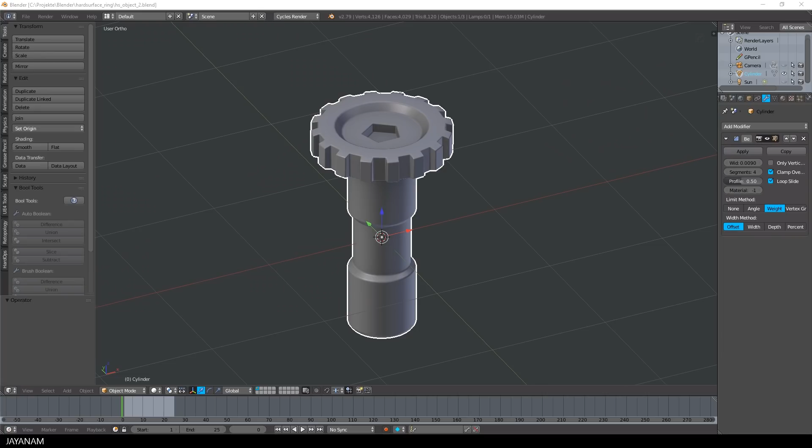Hi guys, this is Jayanam and today I'm going to UV unwrap the Blender hard surface model we created in the last tutorial, and I will texture it using Substance Painter.

So here is the model and I switch to edit mode. Now you can see the sharp and weighted edges in blue color, and I have to select now all the edges that I want to mark as seams. The first edge loops that I want to select, and this is a bit tricky, are the horizontal edges of the gear.

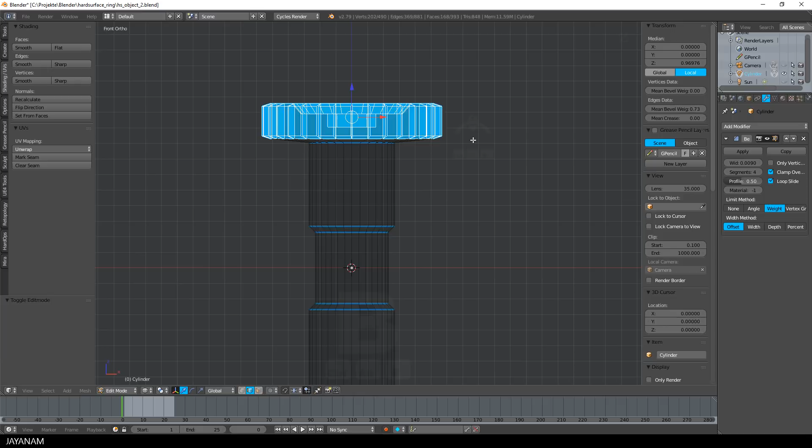So I snap the view and turn to wireframe mode, then I press B for box select and select these edges here at the top. Then I press C for circle select and hold the shift key down to deselect all the edges that lie in between these two horizontal edge loops.

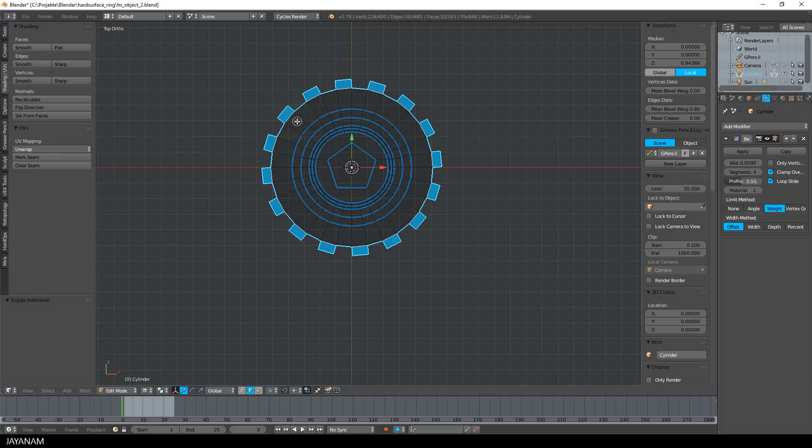Okay, now I snap the top view, then again press C and scroll the mouse wheel to have a bigger circle selection. And then again with the shift key pressed I deselect all the edges that are covered by my selection circle. And the last thing that I have to do is to deselect all these parts here. And I end up with these two edge loops selected.

Perhaps you have a faster way to do this, I don't know. There's always a better way. And now I mark them as seams. And now I'm going to select the next edge. I will add 3 seams of the vertical edges of the gear, and I'll try to divide it into 3 parts.

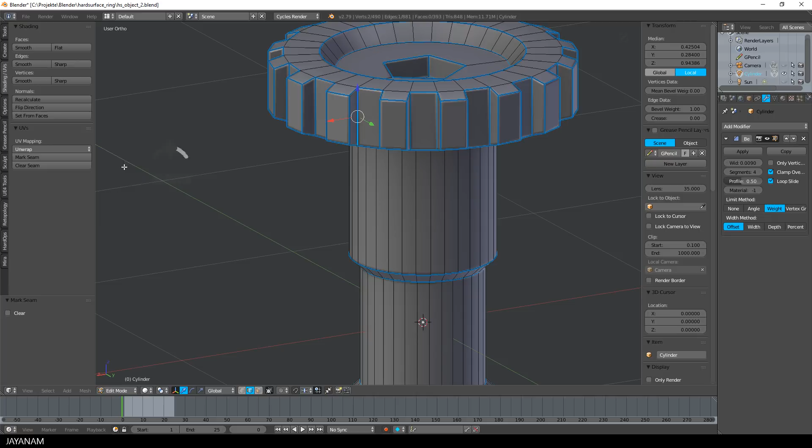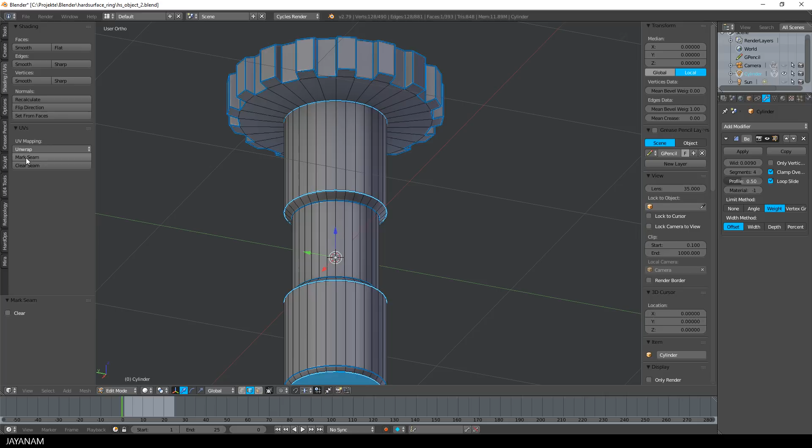Okay, then I will again select these horizontal edge loops by pressing Shift and Alt and right click, mark them as seams. And then 1 seam along the cylinder. Okay, I think we can go with that.

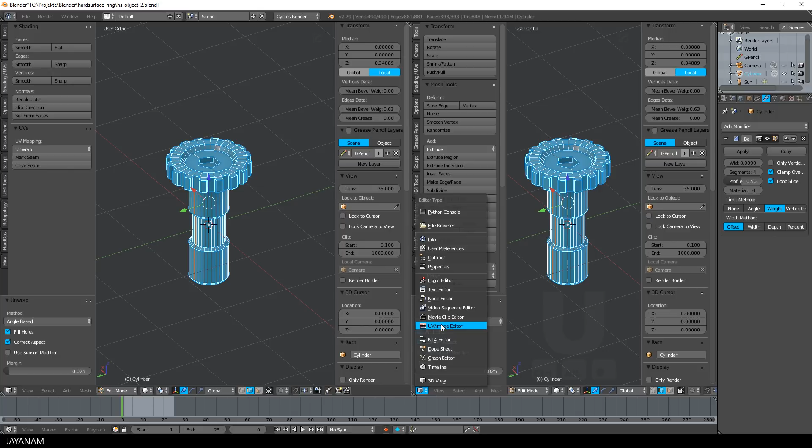I select all, press U and unwrap, then open up the UV image editor. And this looks pretty good, but I will rearrange them a bit. Just select them, press G to move them around. These ones I will rotate 90 degrees. Also this one.

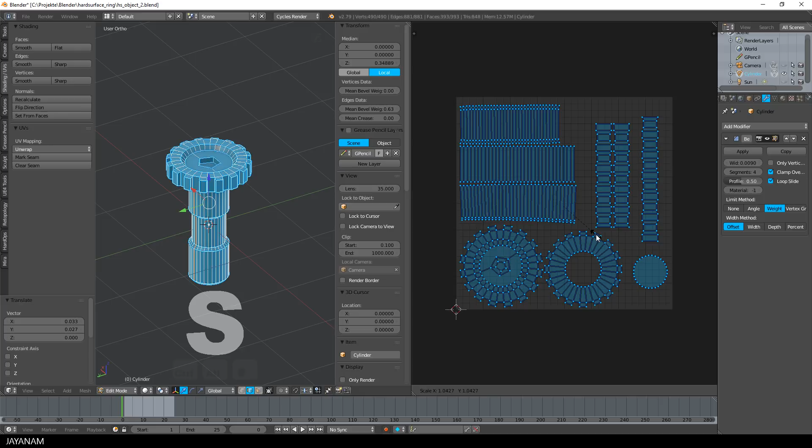Then I select all, move them to the center and scale them a bit up. Just like that. Okay. For these parts here I can press Alt and E to get nice rectangles. This functionality comes from the add-on UV Squares. It's free and I added the link to the description of the video.

Now let's export this as FBX. Choose File, Export, FBX. Then choose Mesh and Selected Objects Only and press Export FBX.

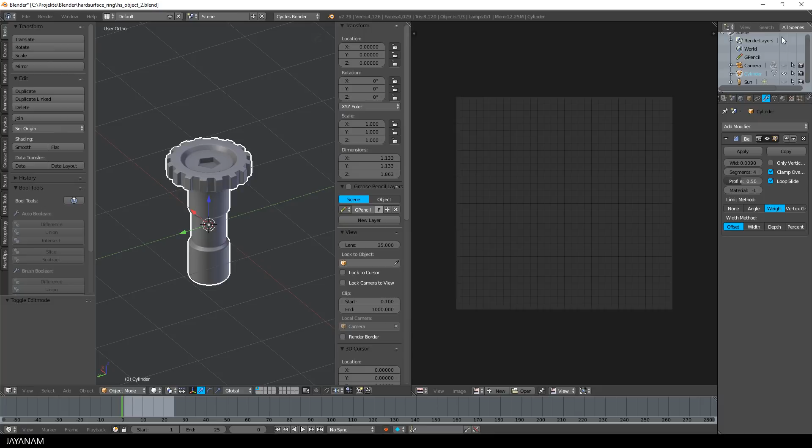Okay, and now we'll kind of test this by adding a simple texture using Substance Painter. So open Substance Painter and create a new project. Select the FBX that we just exported. Then press OK. And here's our model. Looks great, but now I have to bake the textures.

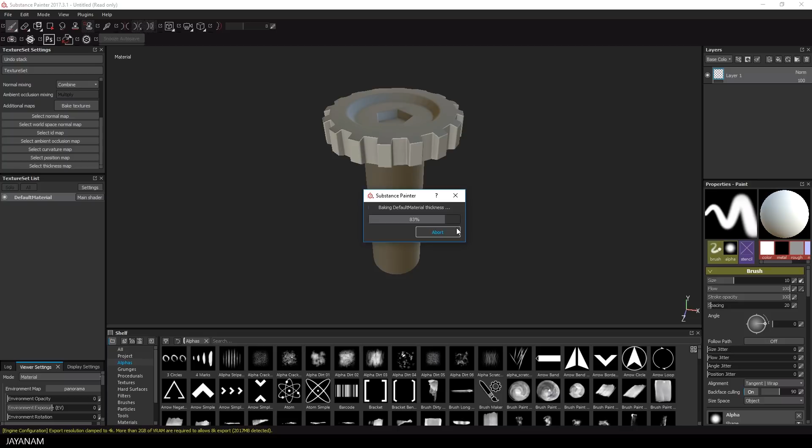And I bake them as 2K. We don't need the ID map. And then I press Bake. Okay, looks good. Now we'll adjust some settings here of the viewer to have shadows and some post-processing effects.

And then I drag a smart material, for example this one here, to my layer stack. Okay, that looks nice. I don't see any artifacts or strange shading behavior. Alright, now I will adjust the curvature settings a bit and the amount of the wear level.